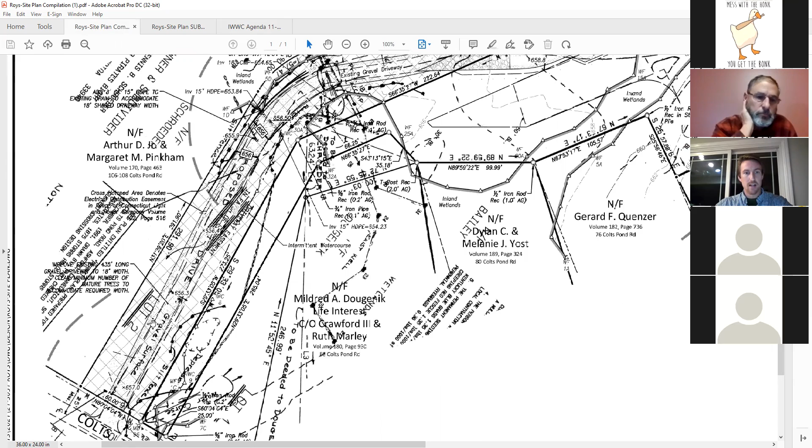This is access from Colts Pond Road. Down in the bottom left-hand corner of your screen, it is a rear lot that was created by subdivision in 1992, and it has a shared driveway with 96. This is an overall view of the property, with the original subdivision plan shown in the background so we can see that we're generally consistent with what was originally there. It's a little messy with the two maps right on top of each other, but here's the existing driveway starting at Colts Pond Road, extending up the flag of the lot in between two wetlands.

An existing wetlands crossing was constructed with two drainage pipes, one here and one here, as part of the original construction of the driveway. Then at this location, the driveway would split. Right now it just enters 96 Colts Pond Road at the top of the screen, and we're proposing to extend that driveway to the east, or the right-hand side of the page.

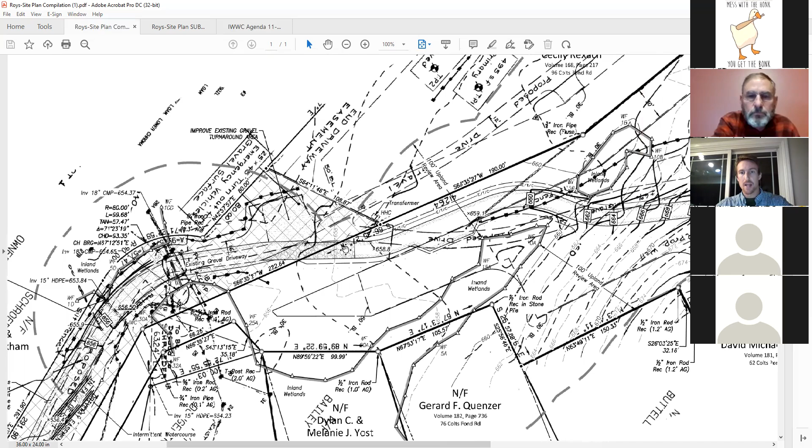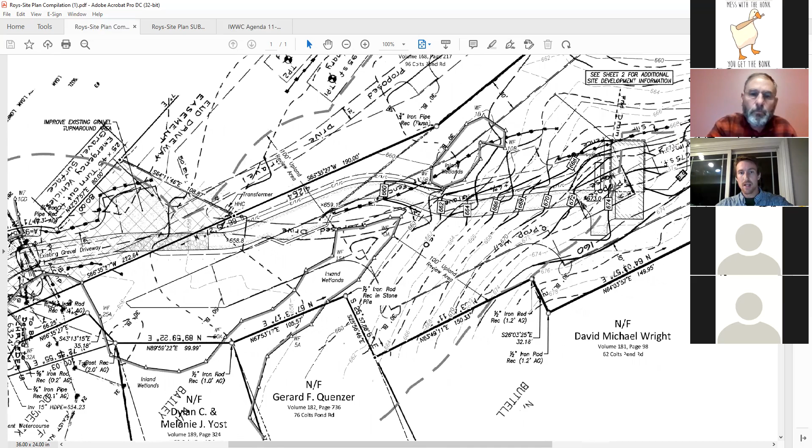The proposed drive here, from the original subdivision, actually clips a little bit of wetlands that was delineated as part of our 2021 wetlands delineation, which wasn't included in the 1992 plan. So we are moving the location of that driveway in between the leg of that larger wetlands and an isolated pocket of wetlands right there.

The driveway comes up to the original building site. We have our house here, and theirs was right there. And then another wetland area that's a little bit larger—you can see it in the 2021 delineation—and the septic system here, right on top of the original proposed primary and reserve areas.

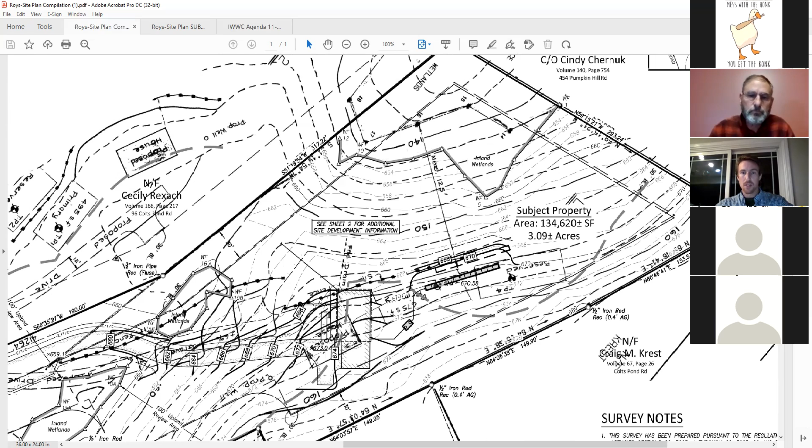Now I will switch over to a clearer plan. This is that same sheet, just without the original subdivision plan behind it. You can see here in blue the limits of the inland wetlands: the larger wetland here where my cursor is, the two pipes crossing under the existing driveway right there to the wetland area over here, that small isolated wetland I mentioned that we are kind of shooting the gap with our proposed driveway, and then the wetland at the northern limit of the property.

And then in red is the upland review area limits. So you can see that almost all of this property is in the upland review area. Just this little area here where the proposed house is going is outside of that.

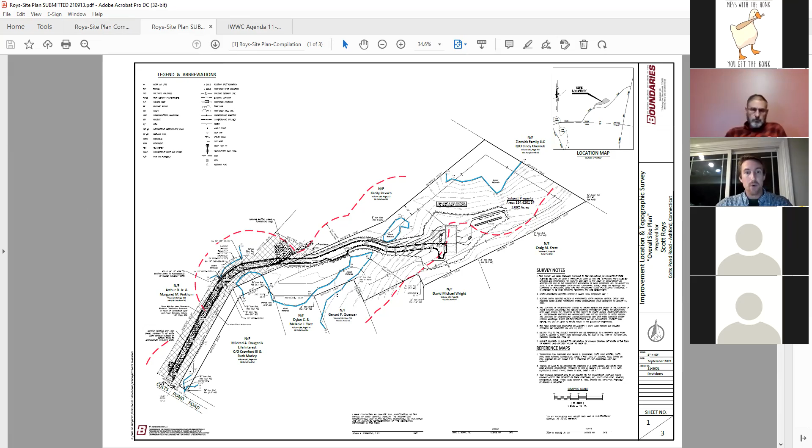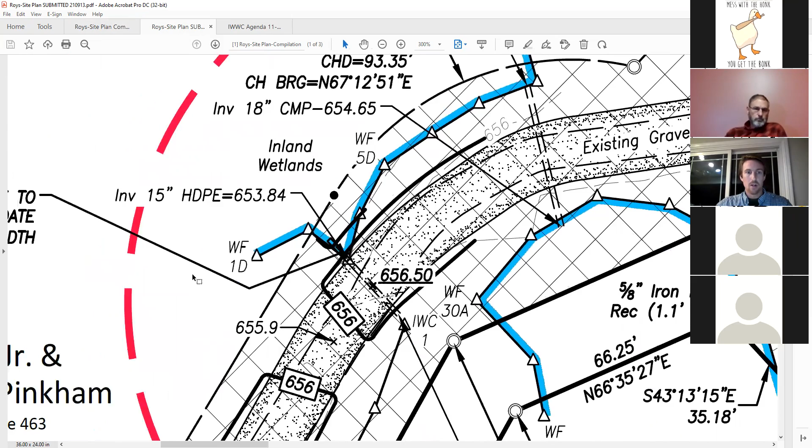There's three parts to the development of this project. First is going to be improvements to this existing driveway to meet current zoning regulations for a shared driveway. Right now, the driveway is about 13 to 14 feet wide, and current zoning requires an 18-foot width for the driveway. So I'll zoom in here, and we can see that we have called out here to add 8 feet of 15-inch HDPE.

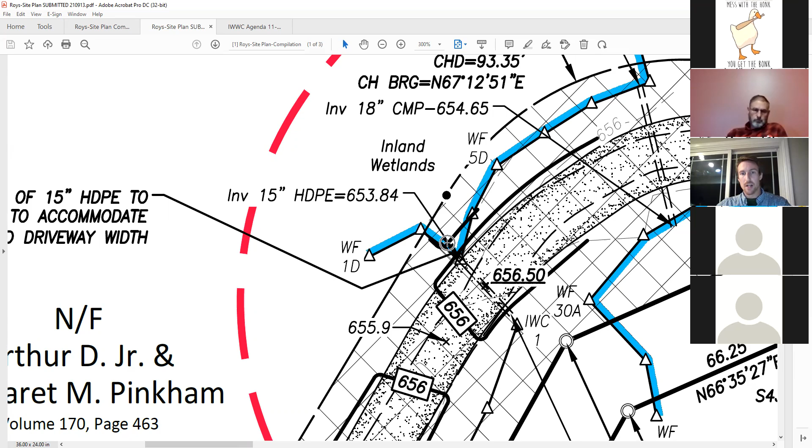As it stands right now, the existing pipe ends just a couple feet off of the edge of the existing gravel driveway. So in order to add the additional width needed for the shared driveway, we have to extend that drain pipe, which includes filling this section of wetlands right here, along with extending that drain. We're looking at 75 square feet of fill in order to accommodate that additional 8 feet of 15-inch HDPE, which gives us the width to allow us to extend our driveway to meet zoning for the shared drive.

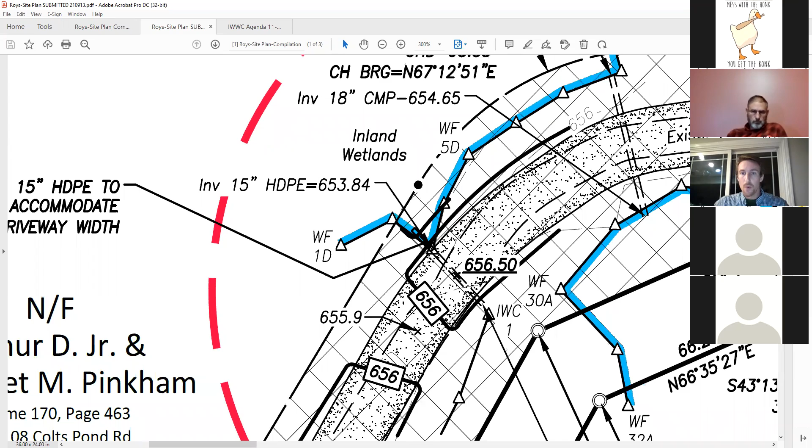And then over here is the existing 18-inch corrugated metal pipe culvert, and that, as you can see, is plenty long enough. No need to extend that. We're just able to widen the driveway without having any wetland fill.

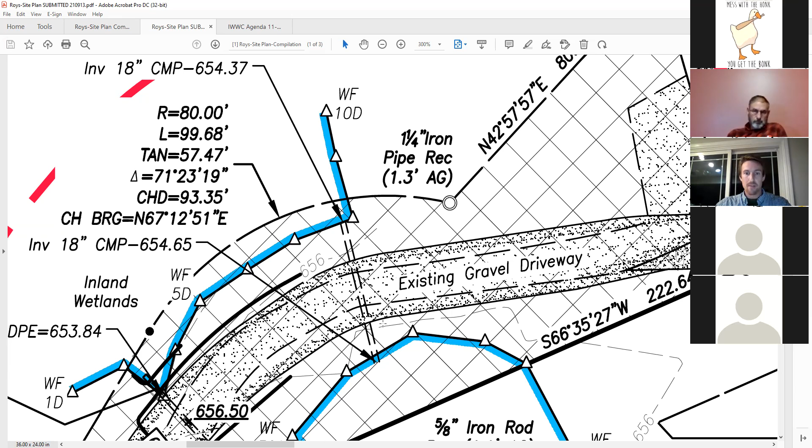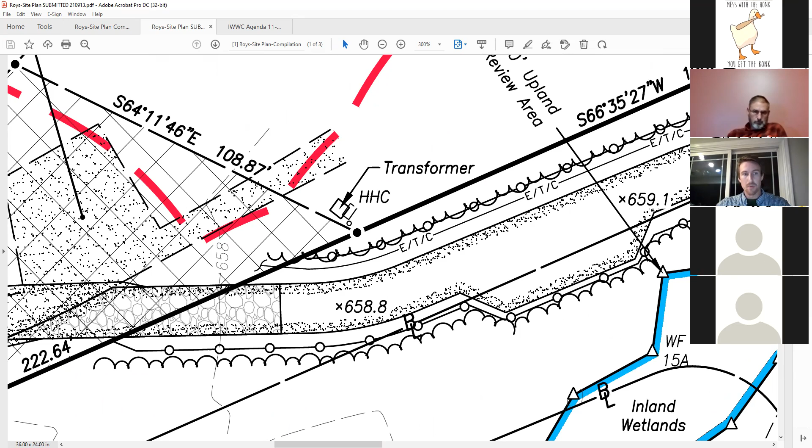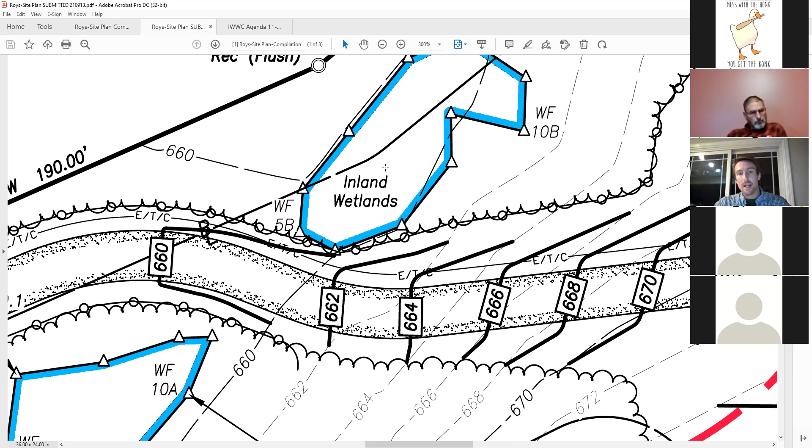And then the next part of the project, once the existing driveway is improved, is to construct our new driveway to access the house site. As I mentioned before, that driveway will be splitting the difference between the extension of that larger wetlands that crosses under the existing portion of the driveway and the small isolated wetlands here.

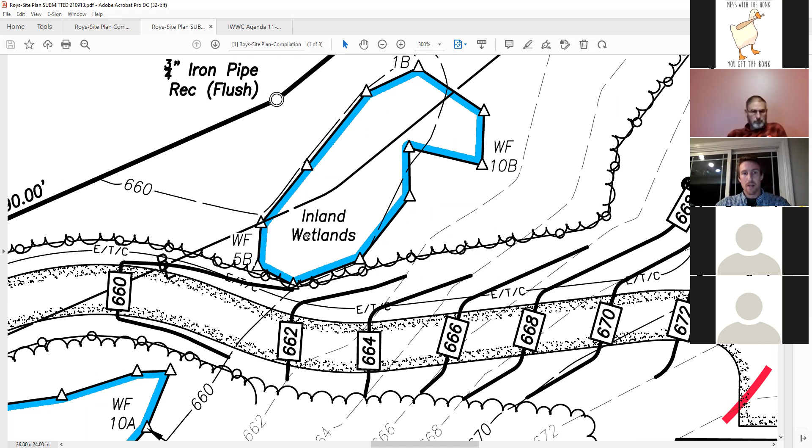And I was out here after we had that pretty torrential downpour over the summer, and there was no evidence of water flowing between these two wetlands after that storm, just some standing water in each.

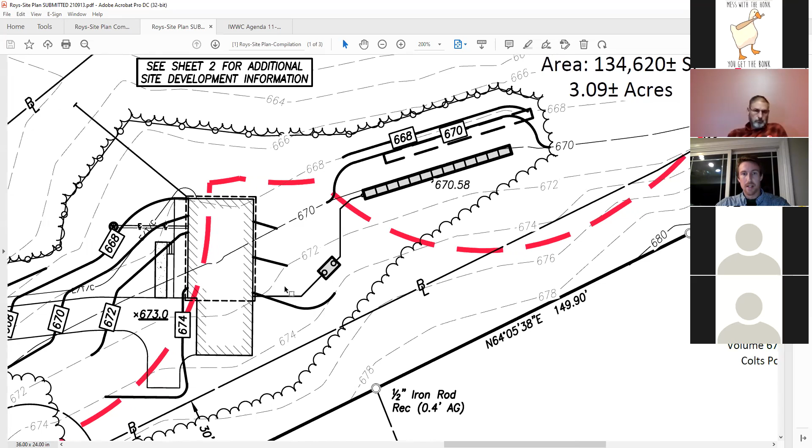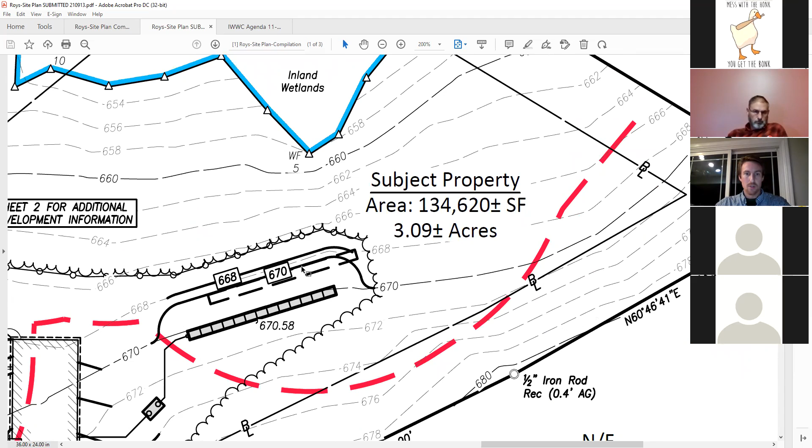Get up to our proposed house site with our well in the front, house here, some of it outside of the upland review area, septic tank here outside of the upland review area, and then our primary row for the septic system and our reserve area for the septic system.

And we have received Eastern Highlands Health District approval of the septic system design that should have been included with the application documents. So that's sheet one of our plan set, gives an overall view of the entire project.

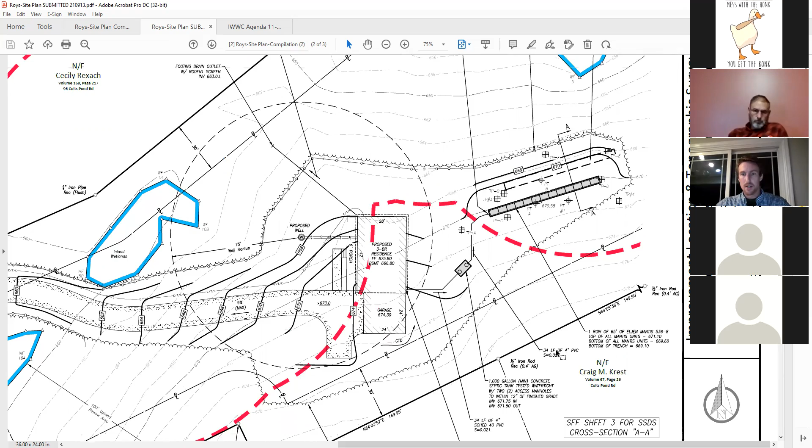Well with its 75-foot radius entirely within the property limits. Proposed 3-bedroom home with a 2-car garage, and then septic system design and notes. And then sheet number 3 has standard details, including the erosion control details, either for sediment fence or a wood chip berm at the down gradient limits of project disturbance.

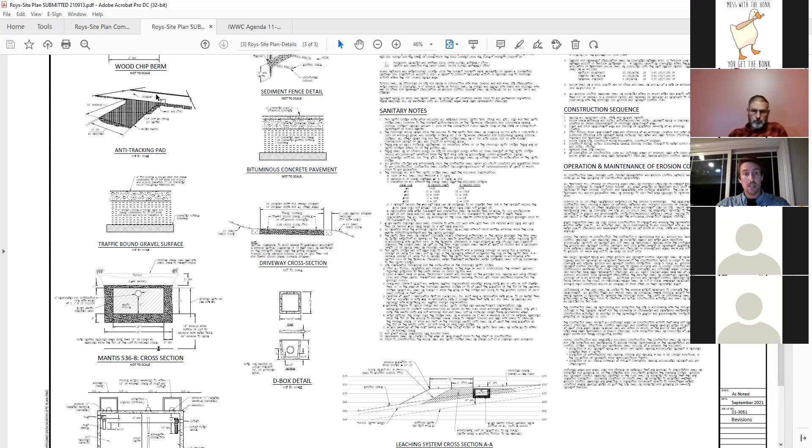An anti-tracking pad to be installed at the limits of the existing gravel drive as they're working to build the new driveway, for our gravel driveway surface, and septic system details.

Cross-section on the driveway. It's required to be 18 feet wide for the shared portion and 14 feet wide in other areas.

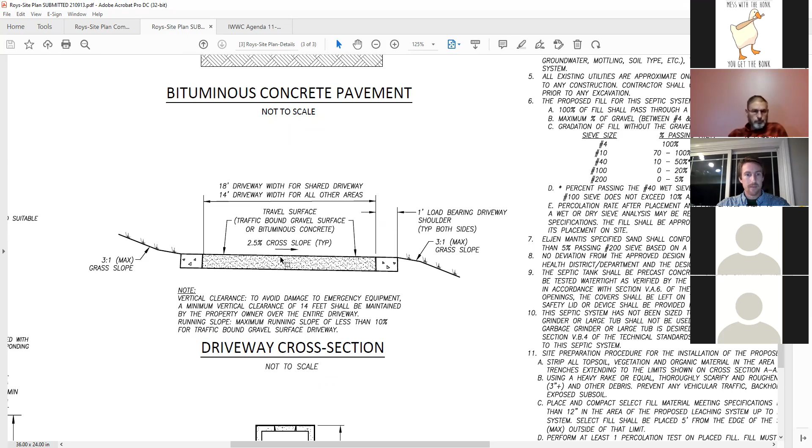Septic system cross-section and notes pertaining to the design and construction of the septic system, and also maintenance and operation of the erosion controls.

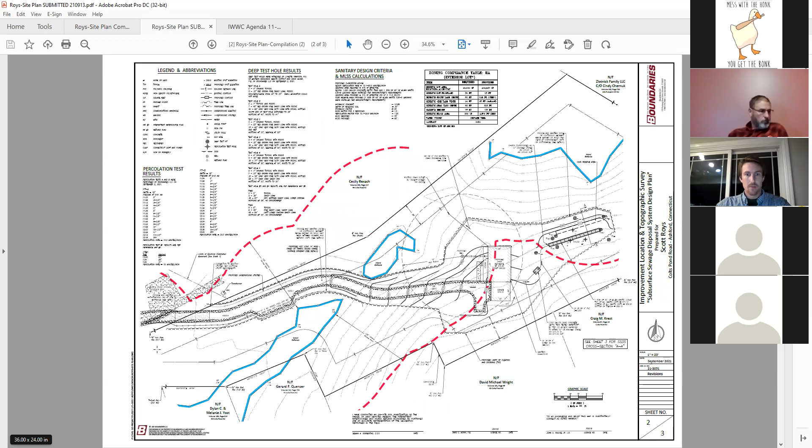I will flip back to the layout plan, and I guess that kind of takes us through our project, and be happy to answer any questions.

Thank you, David. I didn't quite hear everything that you said. You were going in and out, but the plan is pretty well done, so I think I followed you pretty closely. So we'll just go around the room real quick.

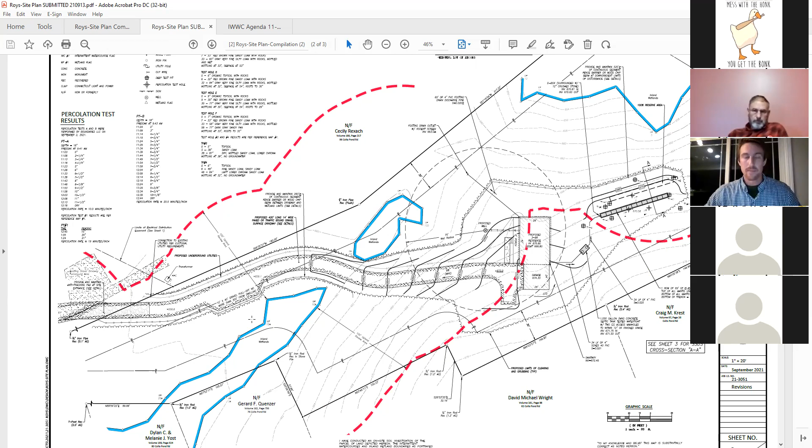Cheryl, do you have any questions or comments? No, and I know we're just receiving the application today, but one thing I wondered is if we could get some photographs of that spot where the wetlands are being filled in, or maybe take a site walk, one or the other.

Peter, do you have anything to add? I was wondering too, if we shouldn't have a site walk on this.

Okay, we'll address that at the end. Rick, do you have any questions or comments?

It was frustrating. You seem to have given a very thorough presentation, but unfortunately I only got about 60% of it, because I could hear you perfectly, and then I could almost hear you, and then it kept coming in and out. So you might want to check that for your next meeting. I thought maybe it was on my end, but it sounds like everybody got the same thing. I could see your mouth going, I know you were doing well, but I just couldn't hear you. I apologize for that. Yeah, no problem.

I'd like to see some information about the wetlands. I assume that would be something you could address in a wetlands report. Yes, and that's been discussed earlier.

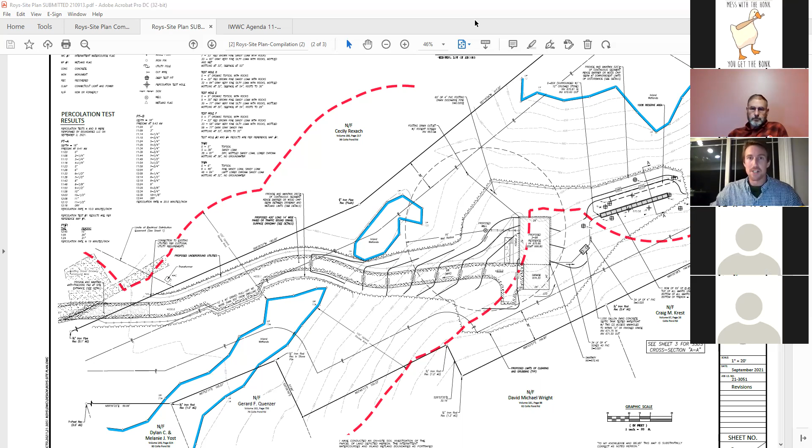Joe, do you have anything to report? Yeah, I got a few things. Number one, I'm happy to report that the Gronus's pond is pretty much fully done. They did an awesome job on it. Everything is good and stable. It's all been seeded and mulched. I walked the perimeter and literally didn't see a bit of sediment in the adjacent wetlands all the way around the berm of the pond. I actually took some photos, so I should be able to email those to you guys if you want. But everything came out good.

Second thing I have is 96 Knott Highway. You guys are probably aware that they haven't done anything yet as far as the plantings or the fencing or basically anything to do with what they proposed.

I spoke with, oh God, what was his name? I'm having a memory lapse here. Daryl, you remember the guy's name? Ron Godet. He's the gentleman that presented the application for them and drew all the plans up and stuff. I spoke with him the end of last week, and he didn't really have a great answer for me.